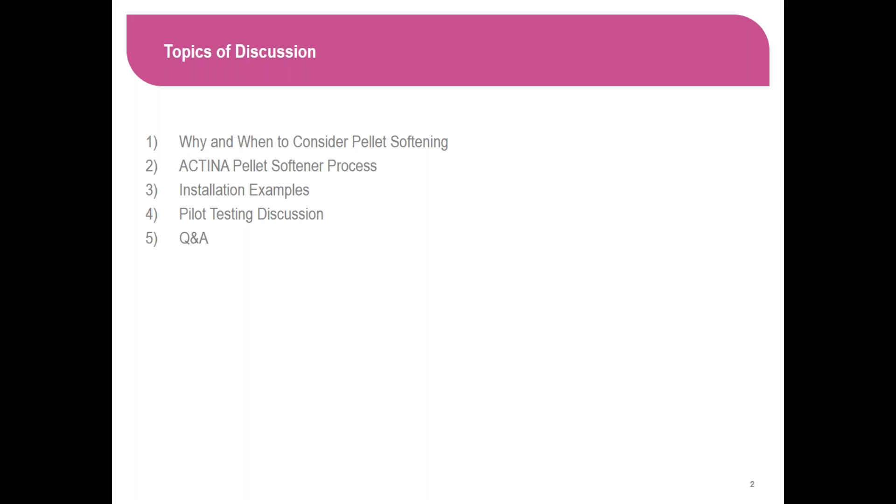So why use pellet softening? It's a very simple treatment process. You can operate it with caustic or lime. There's no moving parts within the process reactor. It is a fluidized bed. So in relationship to conventional lime softening, it does produce more stable operations as far as effluent hardness levels.

Not only do you reduce hardness, but you reduce iron, manganese, fluoride, organics, in addition to the hardness, and that all just kind of happens with no additional effort. You can increase your organics removal, but the iron and manganese just kind of happen at the same time as the hardness reduction.

There's a very small process footprint from a length to width standpoint. It can be tall, but it's a very small length and width footprint. Proven technology around the world. If you're comparing it to some other options like a membrane, you don't have the brine disposal to worry about. And if you're looking at conventional lime softening, obviously you have that lime sludge, that watery lime sludge that you have to dispose of. So the pellets we produce with pellet softening are a good alternative to those two.

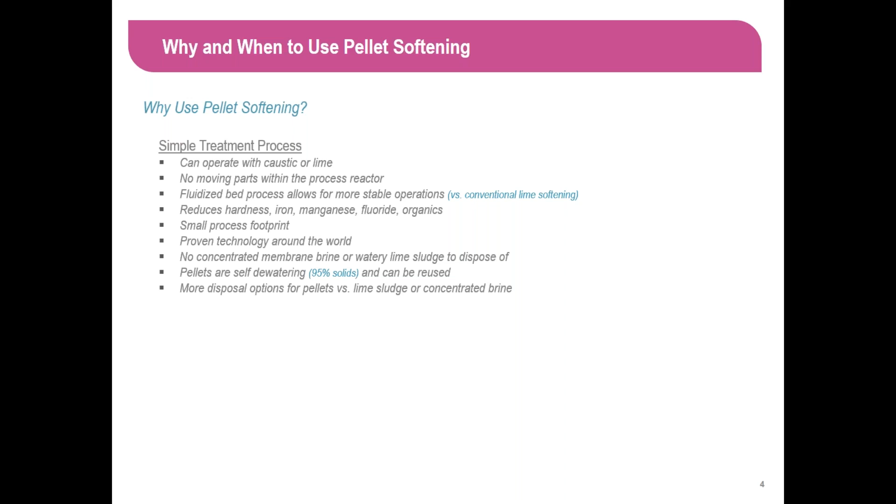So the other part of why you would use it is the operation and maintenance cost savings that are available with it. And we'll get into those a little bit more towards the end, but any equipment or labor associated with mechanical dewatering obviously goes away because our pellets are self-dewatering. And if you have lime sludge and you have a drying bed and some other means of handling your lime sludge, those as well can go away with the pellets, again, because they're easier to handle and are self-dewatering.

If you're just simply going to take your pellets to a landfill versus when you're looking at pellets versus lime sludge, again, we easily get to 95% solids, where if you did some drying and mechanical dewatering of conventional lime sludge, maybe you get to 30 or 40% solids. So just by the simple fact that our pellets can get to 95% solids, there's pretty decent cost savings there just in the number of trips you have to make to the landfill, given the higher solids content.

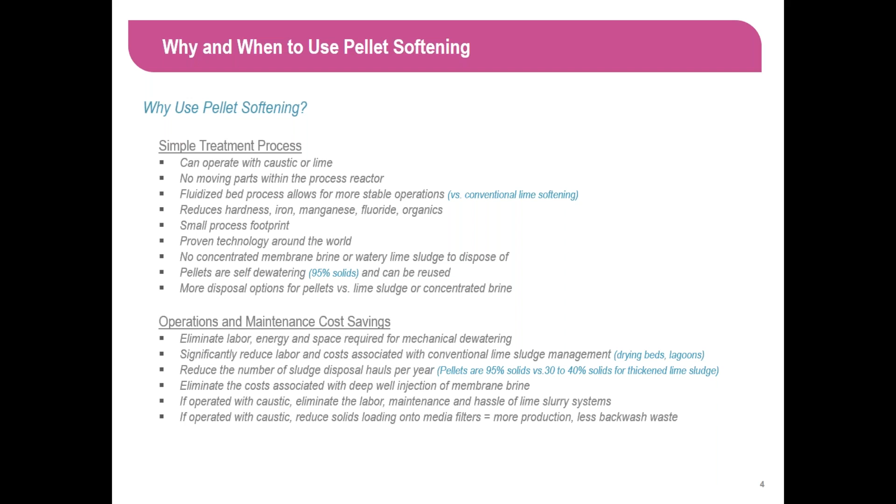Okay, I'll go through these real quick.

So when to use it: if you have current or future disposal limitations on your lime sludge or your brine, that's really been the main driver, either the lime sludge or the disposal of the brine. That's the case in most of the projects we're currently working on in the US with pellet softening. Those two are one of the two main drivers. If you need to expand your capacity but don't have the space to do it with conventional lime softening, you can also use it as pre-treatment to an existing ion exchange system to lighten the load on that ion exchange, reduce your salt consumption, and actually improve your media life and water quality consistency by pre-treating with pellet softening.

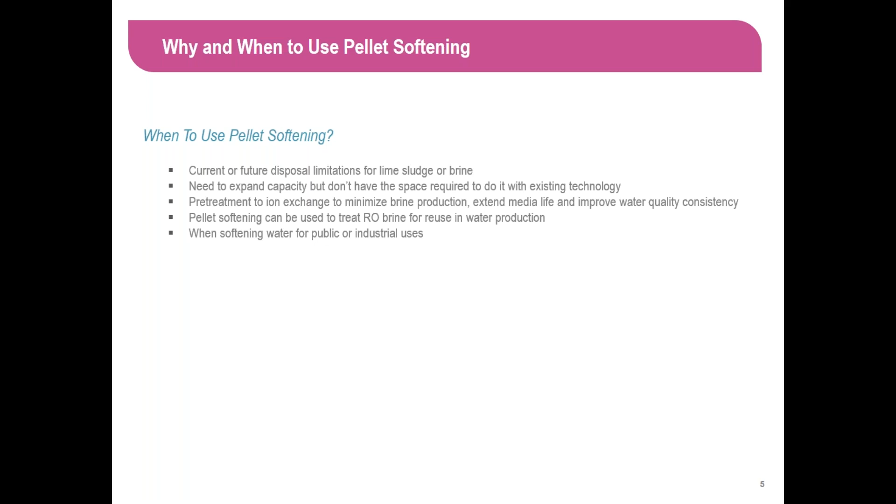You can also use pellet softening to treat reverse osmosis brine - if you're using RO to treat your groundwater and you have a brine, you can actually treat that brine with pellet softening. Really anywhere you're producing water for public or industrial uses, pellet softening is a good option.

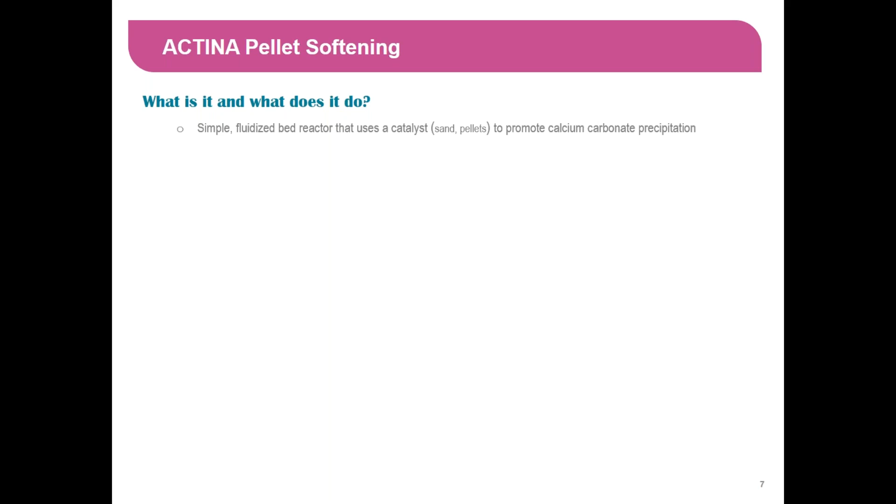So the technology itself is basically a simple fluidized bed reactor that uses a catalyst, whether that's sand or crushed calcium carbonate pellets, and we promote calcium carbonate precipitation on that catalyst. Here's a typical ACTINA reactor where the flow comes in the bottom, goes through some flow strainers, then up through the fluidized bed portion, and into this flared portion where the water slows so the catalyst remains in the fluidized bed portion, and then your effluent comes out the top.

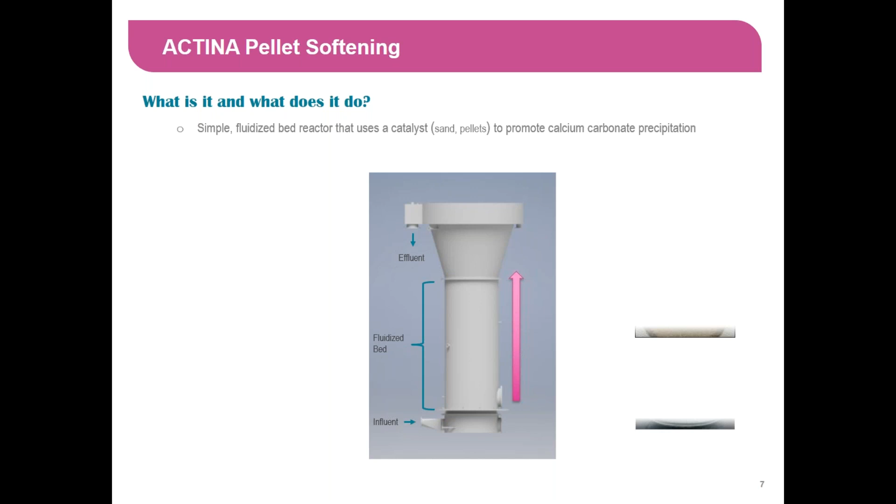This fluidized bed portion of the reactor is full of catalyst, whether sand or calcium carbonate pellets. The size of the pellets or sand will differ over the length of that fluidized bed based on how long it's been running, and so on - which I'll get into in a minute. But that's really where it all takes place.

You'll adjust the pH at the bottom. The change in pH causes the calcium carbonate to precipitate and grow onto the catalyst in that fluidized bed, reducing calcium and some magnesium hardness. Again, we produce easily dewatered, reusable pellets which, depending on your raw water quality, can look something like that.

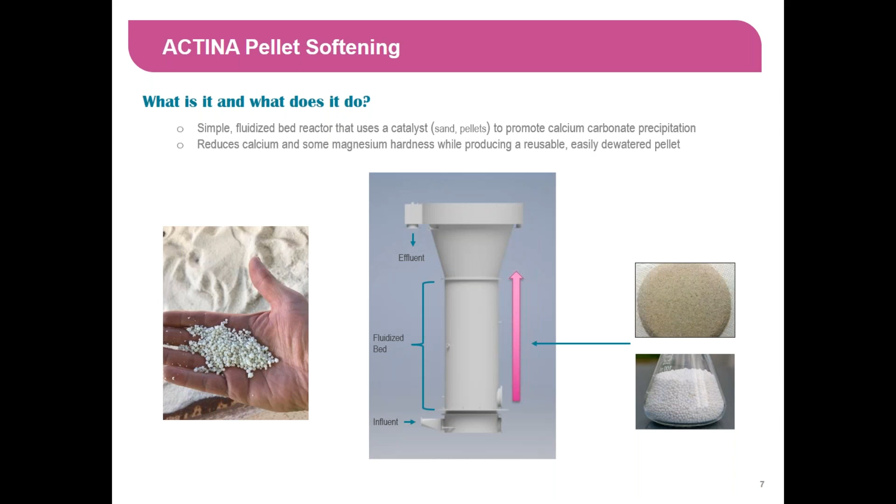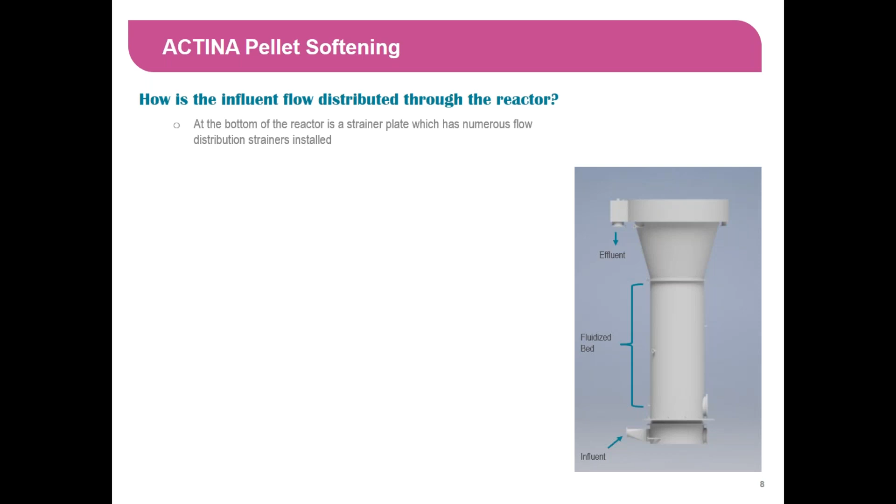So how is the influent flow distributed through the reactors? At the bottom of the reactor is a strainer plate with numerous flow distribution strainers installed. If you take this bottom portion of the reactor and pull it off to the side, the strainer plate is what you see on top, and the nozzles are the individual components attached to the strainer plate. So that strainer plate - say there are 200 strainers - is a metal plate with holes in it, and each individual strainer goes into one of those 200 holes.

This is what one of our flow strainers looks like. We use a strainer that's been specifically designed over the years for pellet softening, with a lot of advantages. It does a really good job of equally distributing the flow, but it also allows material to pass through the strainer, which I'll show you in more detail in a second. Pellet softening is pretty straightforward, but that even distribution of flow coming up through the reactor is really critical.

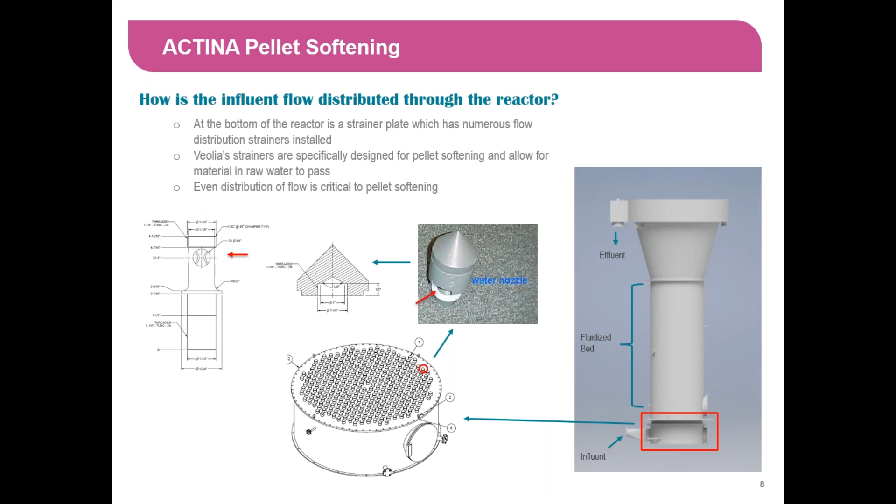This strainer is in two pieces: a cap, and this other portion. There's a lip right here that sits on the strainer plate - this part goes through the hole, this side is threaded, and the lip sits on top of the strainer plate. We just use a nut to attach each individual strainer to the plate. The flow comes up through the middle and comes out through these three holes, and the cap sits on top with slits as well. Again, the purpose is to equally distribute the flow while allowing any material that may come in with the raw water - say small particulate - to pass through without creating a clogging problem at the base.

This is a picture of multiple flow strainers installed in the strainer plate at the bottom of one of our reactors.

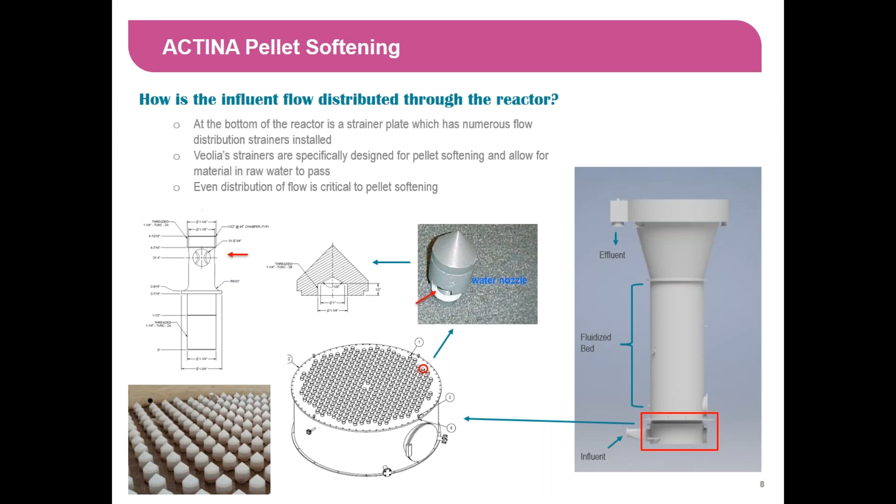So for chemicals, we will increase the raw water pH, as I mentioned before, with either caustic or lime. We have the fluidized bed catalyst, which is either sand or calcium carbonate pellets. On the effluent side of the reactor, we reduce the pH back down to something towards neutral, 7 or 8, to stop that precipitation reaction before the water goes downstream, whether to filters, a membrane, or whatever. So you simply adjust the pH back down.

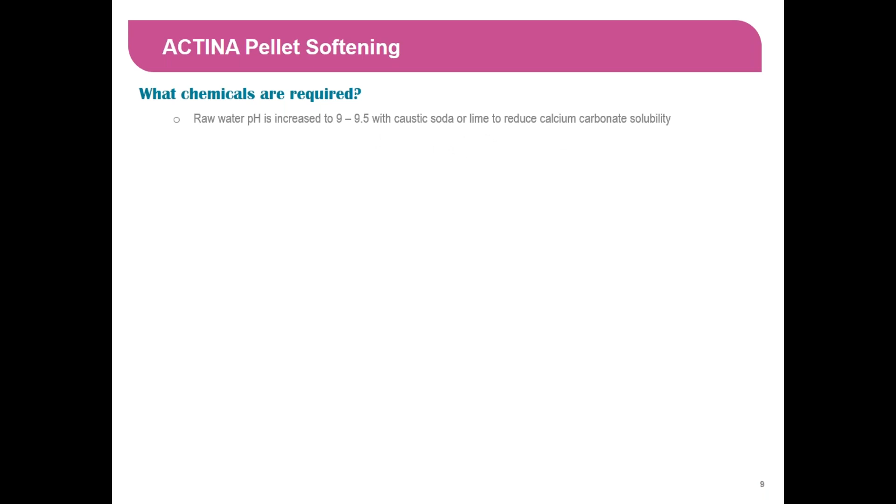So let me focus on increasing the pH real quick. You get the same reactor diagram. At the bottom is where we have this removable spider, and what we do is inject, whether it's caustic or lime, using softened carrier water to deliver that pH adjustment chemical to this spider, which sits at the bottom of the reactor just above that strainer plate I showed you in the previous slide.

If you take that section away, the blue plate is the strainer plate, and then you see the gold colored flow strainers. Right above that is that circular support structure, which we call a spider or chandelier. On that, you'll see there are 3 nozzles. Each nozzle has a pH adjustment line going to it and a softened carrier water line going to it. The purpose is to bring those in individually and then combine them together under pressure in the nozzles so they disperse out through each of the nozzles.

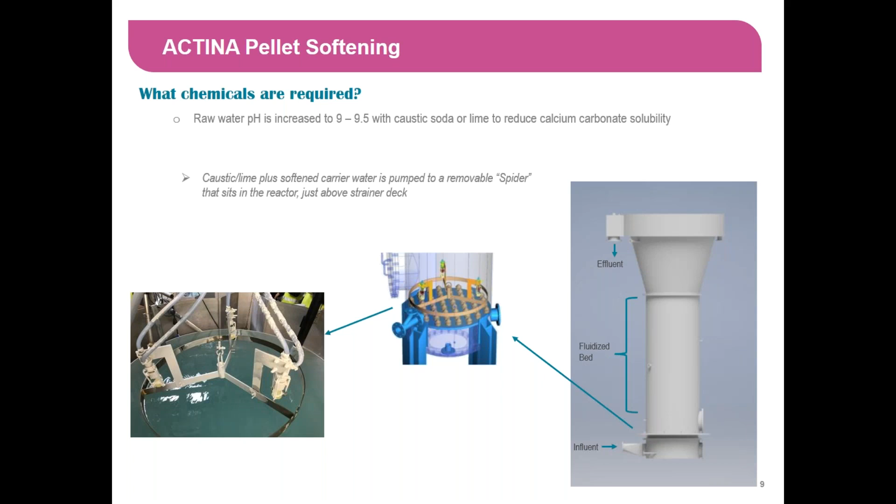The number of nozzles in any given spider is driven by the diameter of the reactor. The bigger the reactor diameter, the more of these nozzles you will have. In this particular example, you have 3 separate nozzles on this spider. This thing is suspended from the top. In the picture to the left, you can see there's a cable attached to it. It goes all the way to the bottom of the reactor and sits there, connected at the top, so if you need to remove it, it can easily be removed without having to drain the reactor itself.

At the top of the reactor, in a separate panel, we'll have a rotameter and pressure gauge on each one of these lines going to the nozzle. So while this thing is sitting at the bottom of the reactor, you can have a good idea by looking at these rotameters and pressure gauges if there's some type of issue going on, whether your flow isn't the same between the three nozzles, or you see elevated pressure in one of them. The intent of having this thing suspended from the top is if you do see some type of issue, you can pull it up, pull it out of the reactor, inspect it, do what you need to do to it, and then put it back in pretty easily.

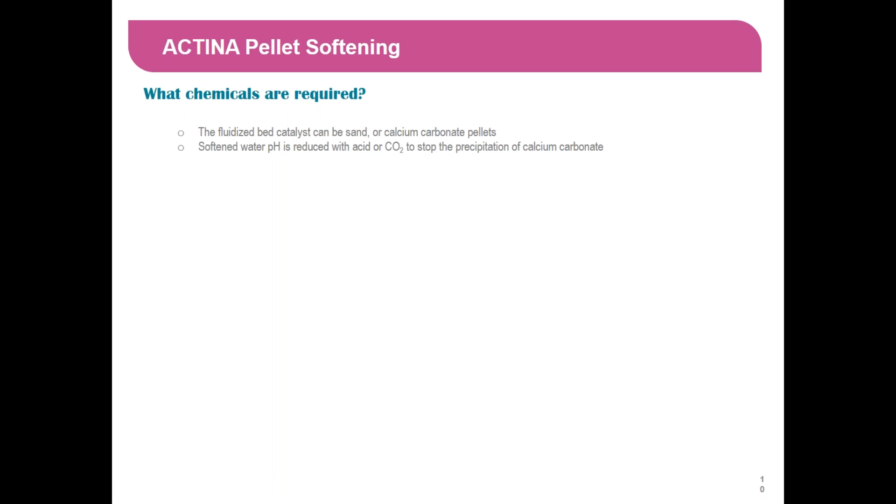Continuing, so the fluidized bed with the catalyst is added either by a pump or an eductor into the side of the reactor or to the top of the reactor, and there are a couple of different ways you can do that. Depending on the size of the reactor, I would say the most common way is with some type of bulk storage, whether it's a bulk bag system, which holds like a 2,000-pound super sack, or a small or large size silo that holds the catalyst.

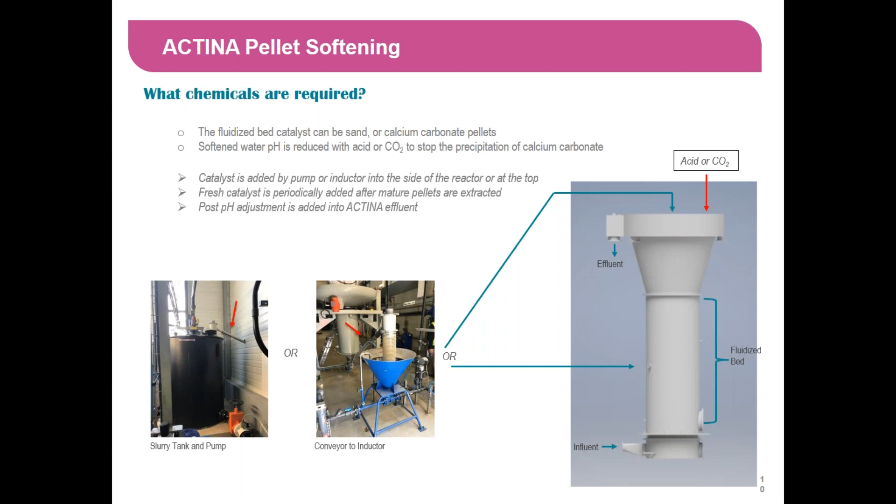So when and how are the pellets extracted?

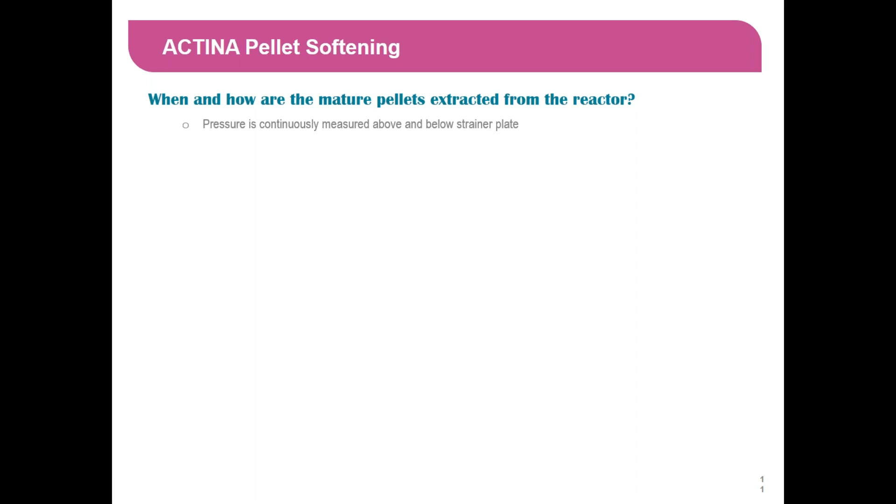We continually monitor the pressure inside the reactor. The strainer plate I mentioned earlier, which has our flow strainers, is here—you can see the weld marks, and the plate is obviously inside the vessel. We monitor the pressure below and above, and the difference between those two we correlate to a pellet size in the reactor itself. This is a relationship we set up during commissioning.

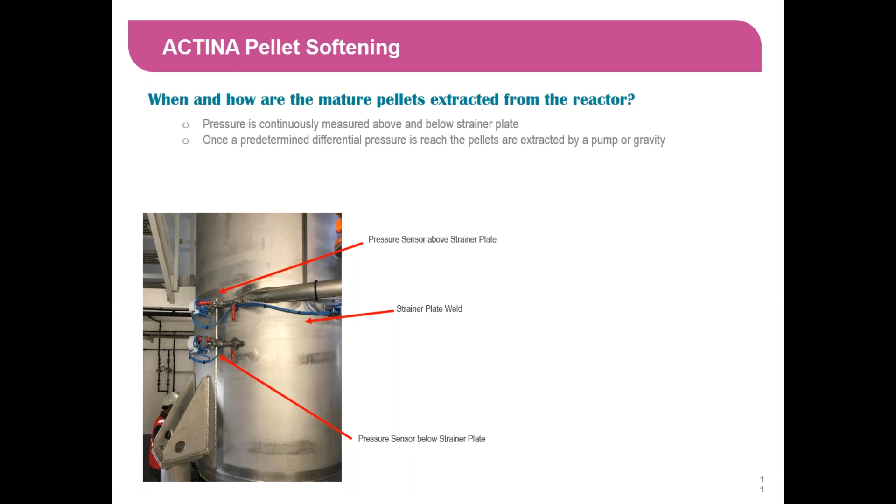So there are two ways you can do it. You can use these pressure indicators, or you can just go by time—like it's run for 9 hours, so it's probably time to do an extraction. But either way you trigger the extraction, the pellets are extracted either by a pump or by gravity.

When the extraction actually happens, there's a separate pipe off to the side of the vessel with a valve. Once you open that valve, the head pressure from the reactor pushes out the pellets through that piping. It stays open for a certain amount of time, then closes and flushes the line—that's pretty much an extraction. You don't stop flow during the extraction.

What's going on inside that reactor is you have different size pellets inside that fluidized bed portion. The larger pellets will be towards the bottom because they're larger and heavier, so we want to extract towards the bottom. If you look at that picture to the right, just below the pellet extraction pipe you can see the weld marks for the strainer plate—so we're drawing off the pellets right at the bottom of the reactor. The purpose is to get the larger ones out and keep the smaller ones inside, because it's a fluidized bed, so if the pellets get too big it's harder to fluidize them. You manage pellet size either based on this differential pressure or by time.

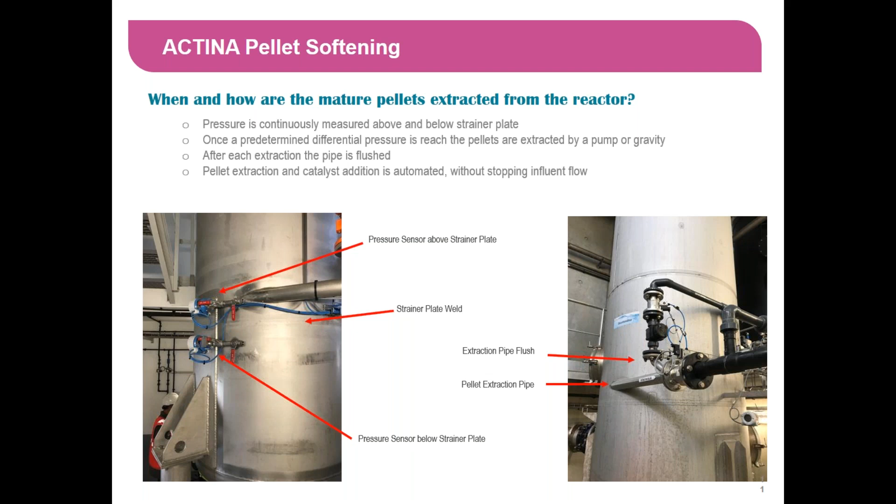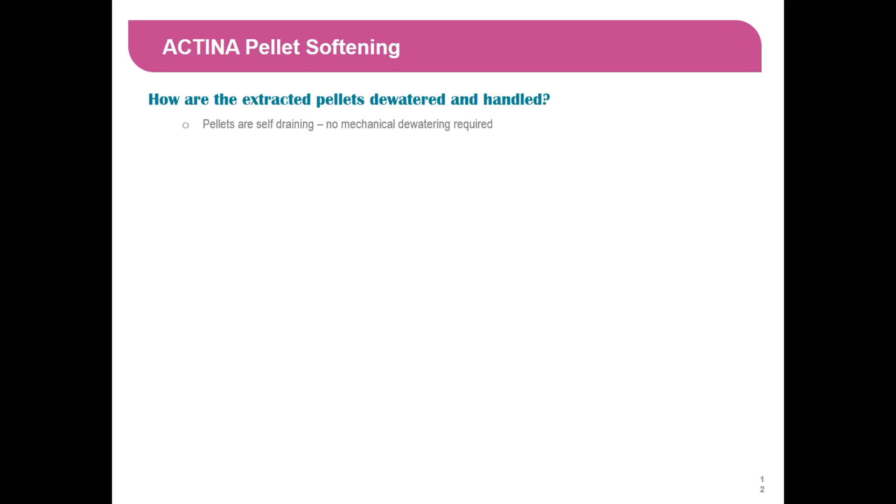So how are the pellets dewatered and handled? As I'd mentioned before, they're self-draining—we don't need any mechanical dewatering. A lot of times it's just these simple bins; I've seen Baker Tank has these. It basically has a screen at the bottom of the bin, with probably 6 or 8 inches of headspace underneath the screen.

The pellets get extracted into this bin, and the screen maintains the pellets in there while also allowing the water to drain out away from the pellets. It's hard to see in this picture, but in the front of the bins there are these drainage ports. This one is a single bin, and you can see the pipe here coming out from the plant.

Depending how close this bin is to the actual reactor, you could just do it by gravity, where you open that valve and the pellets make their way into this bin. This one obviously is outside, so it just has a simple tarp that you can pull over it to keep the rainwater off.

The one down here is kind of a duty standby scenario, where this one is covered to keep the rain out, but you can see there's a PVC pipe that comes out here. It basically has a piece of rope on it, so you can change which bin you're discharging to, just by swinging it over. Or you can move within a bin to which part the pellets are actually discharging into, which I'll show you here in a second to better explain that.

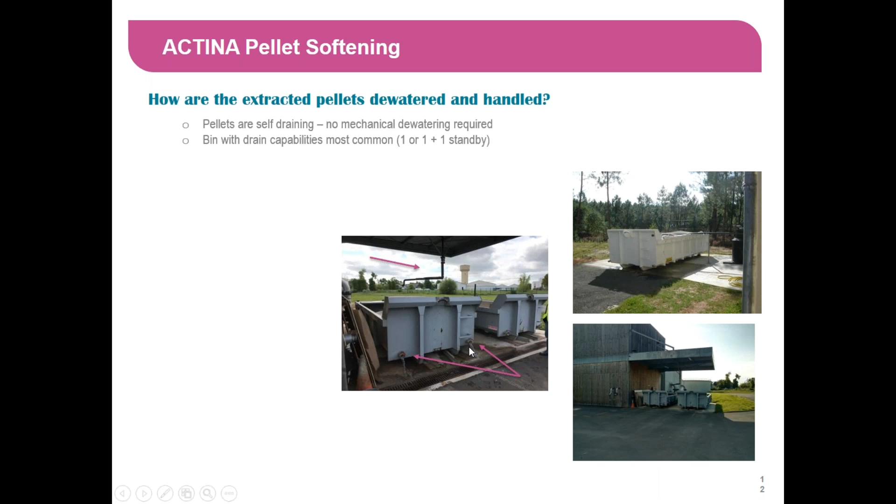Here you can see the water that's running off the pellets. Again, there's a screen maybe 6 or 8 inches above the bottom that retains the pellets but allows the water to drain off.

For larger installations with higher hardness, it really comes down to your pellet production rate, but you may need something more substantial for the pellets. I'd say all the projects we've done and worked on so far haven't required this large pellet storage, but there are a few different versions we've designed. It really just comes down to how much flow you're treating and how much hardness you're removing.

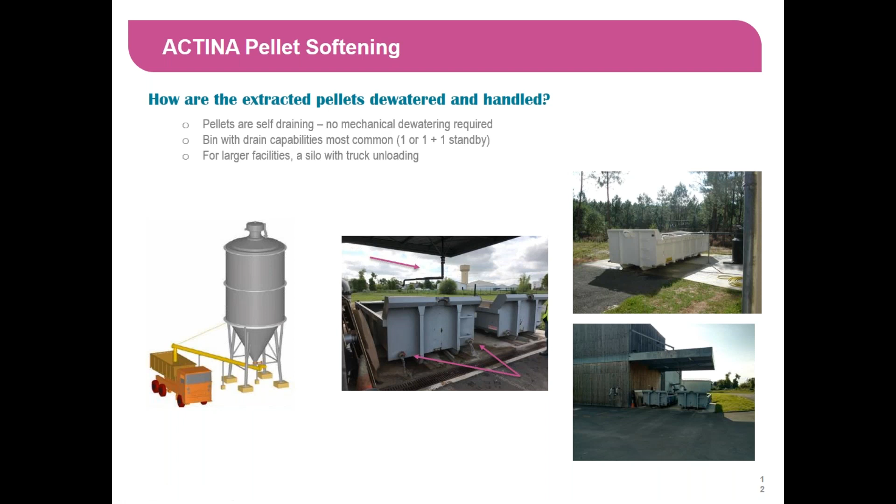In this particular installation, they're surrounded by farmland, and the farmers come, I think, once a month and actually take the pellets and use them mostly for fill. This installation doesn't have any pellet disposal at all, the farmers come and take it for free. The runoff or drainage you see here can be recovered and sent back to the head of the plant, it doesn't have to go to waste. So there's a lot of different options you can do with that.

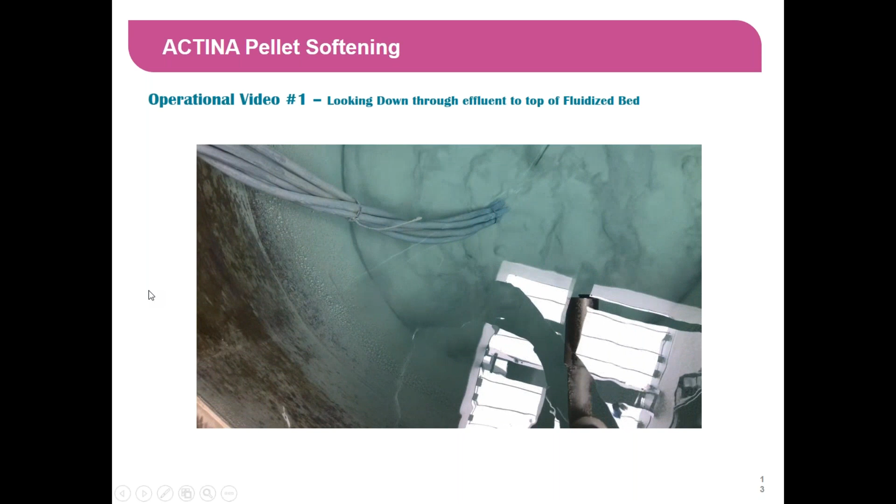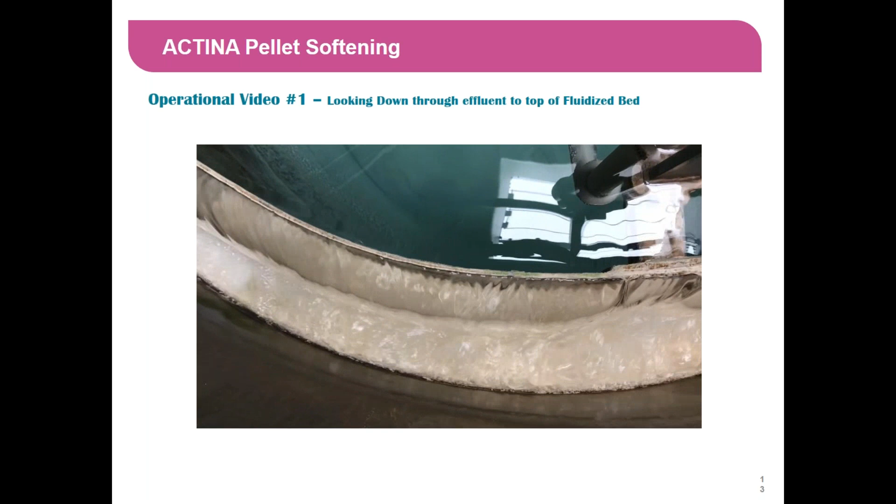Here you look down on top of the fluidized bed, so you can see it's really nicely, evenly distributed throughout the cross section of the reactor. You can see the tubing that's going down to the spider to each of the nozzles. This is the overflow weir, just a straight edge weir that goes all the way around the top, so the softened water comes out.

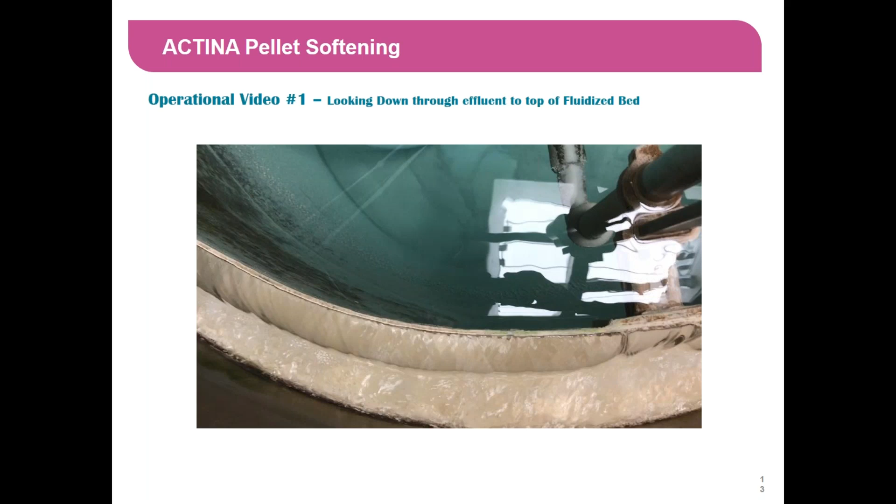If you were to adjust the pH, you could easily drop it into this outer rim. There'll be a common discharge point on one side of the top of the reactor, so you could add the acid towards that side, and it doesn't really take a whole lot of mixing. You can achieve that decrease in pH pretty easily before it goes downstream.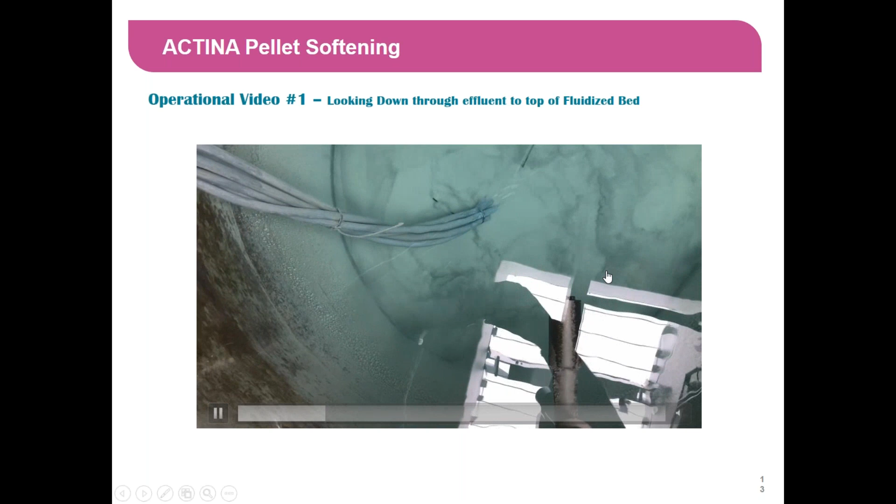Let me show you just one more time. So again, what you're looking down on is the fluidized bed. This cable attaches to the spider, and these hoses go down to the nozzles on each spider.

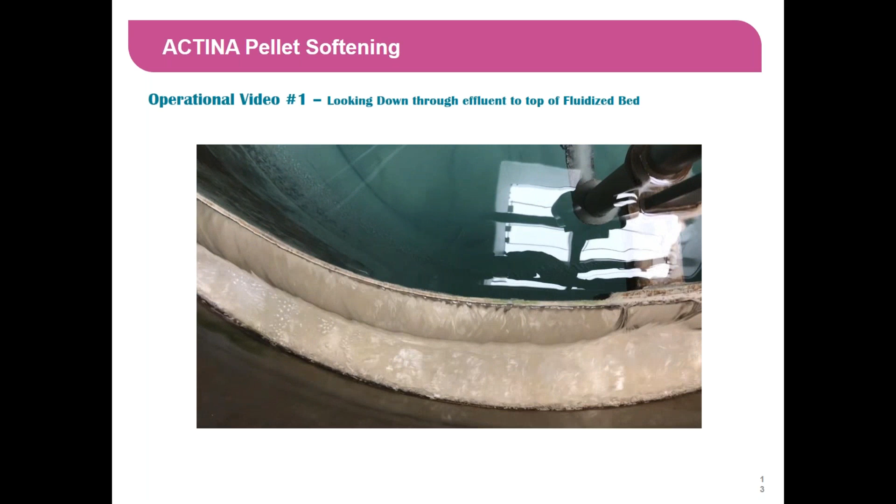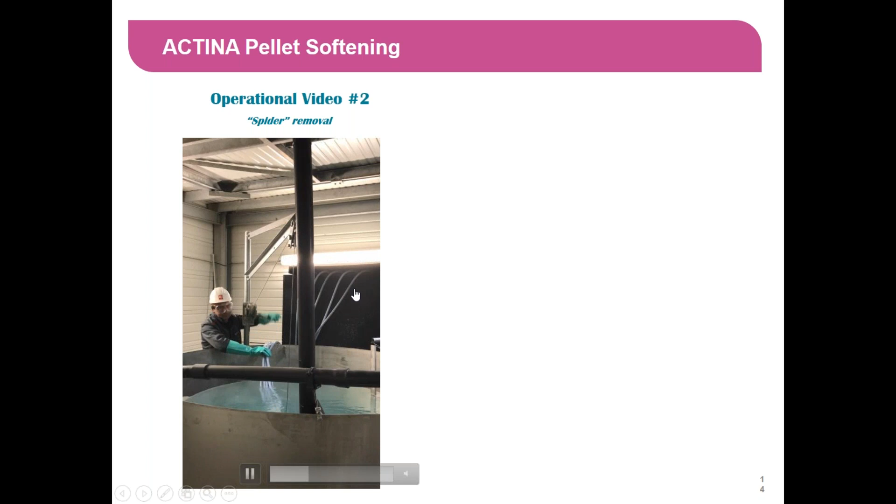Okay, the next one I want to show you is the actual removal of the spider itself. This whole process took about 5 minutes, but this is the tail end of the removal. This panel behind here is what I had mentioned before, which houses the rotameters and pressure gauges for each of the lines going to each nozzle, so you can monitor what's going on at the bottom of the reactor in that spider.

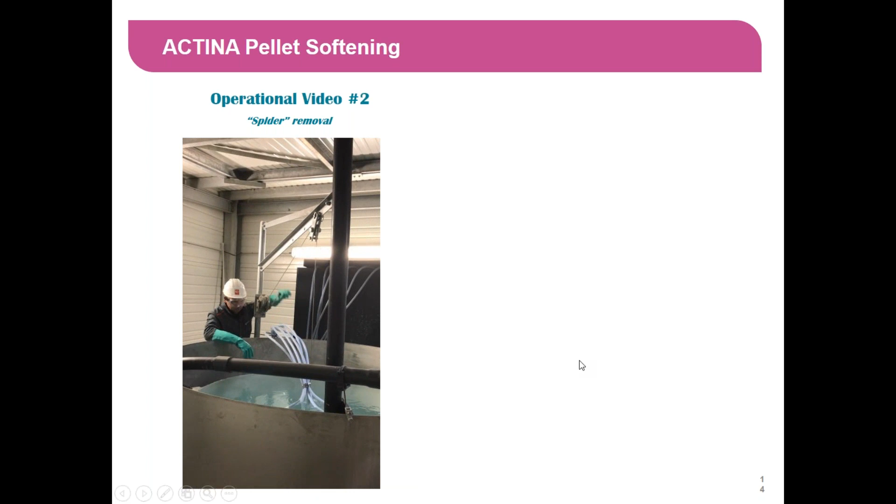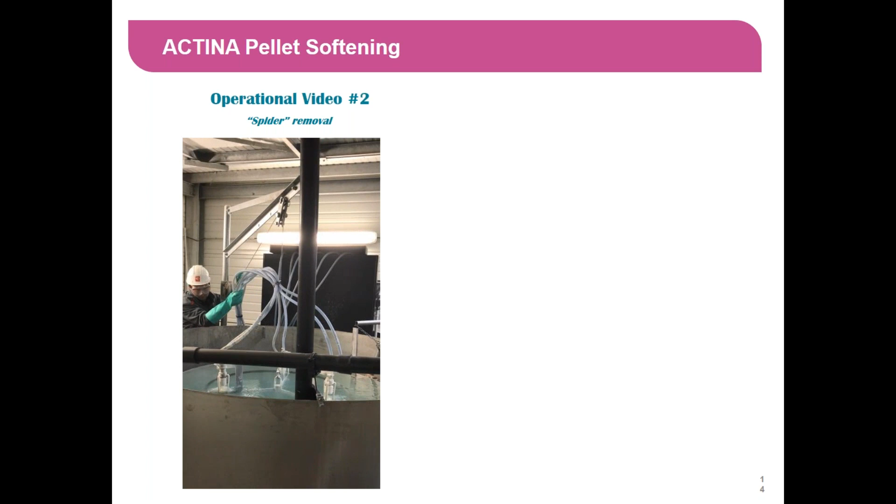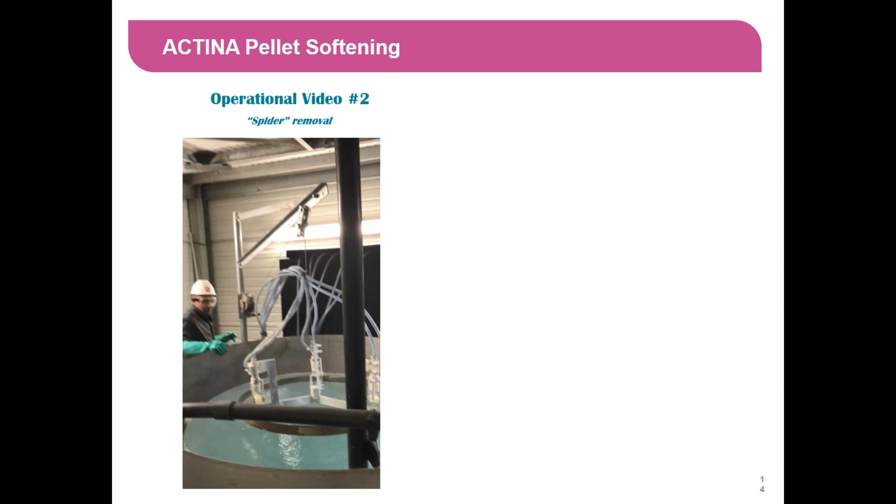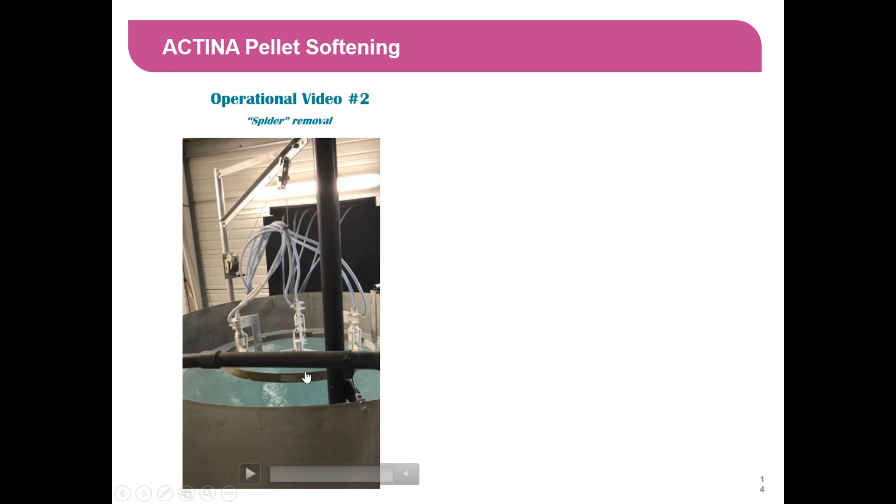So here you don't have to have flow going through the reactor, but when you lower the spider back down into the reactor, you do have to have the media expanded. But if there was something you wanted to look at, or you thought maybe there was a problem, you could easily pull this up, do what you needed to do, and then drop it back down. Ideally, you want to have the ability to raise this above the upper level of the reactor and be able to swing it over, and have grating or checker plate over here where you could lower this spider back down and do what you need to do, then pick it back up, swing it over, and drop it into the reactor again.

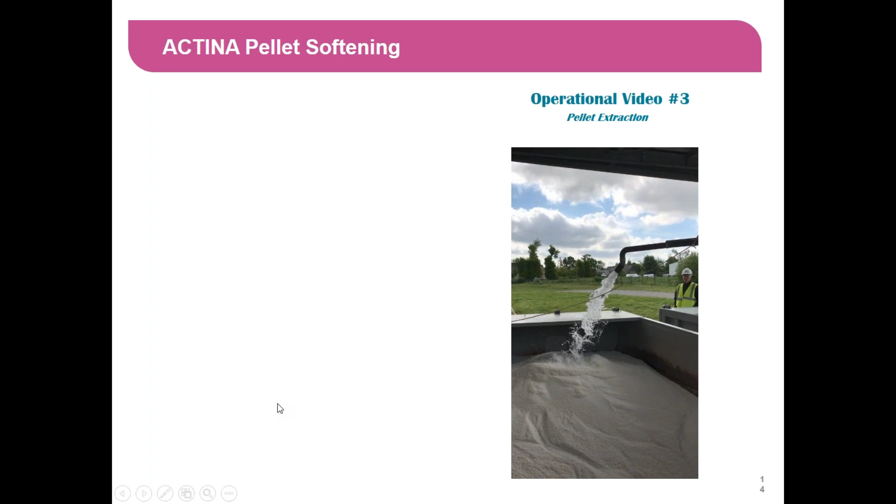So this is the pellet extraction. This was that 2-bin example that I was showing you, and you can see the discharge pipe there, and then just the rope that's attached to it where they can move it to where it's discharging in different spots within a bin or swing it between the 2 bins.

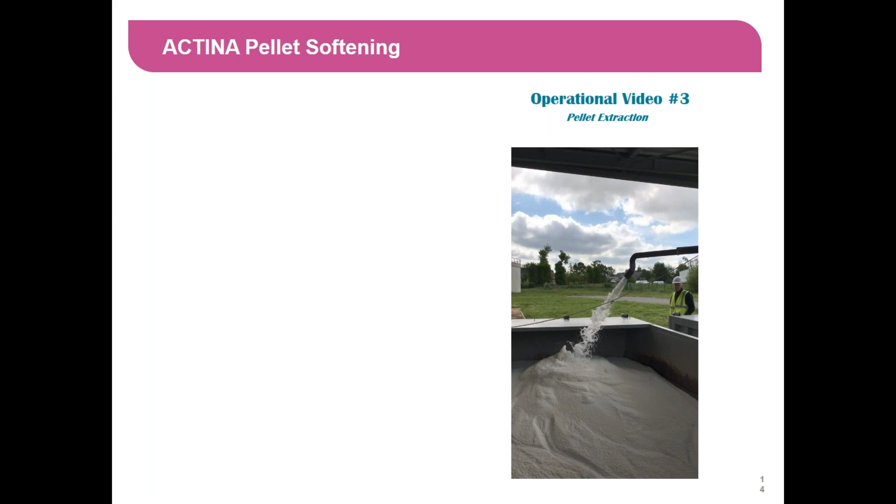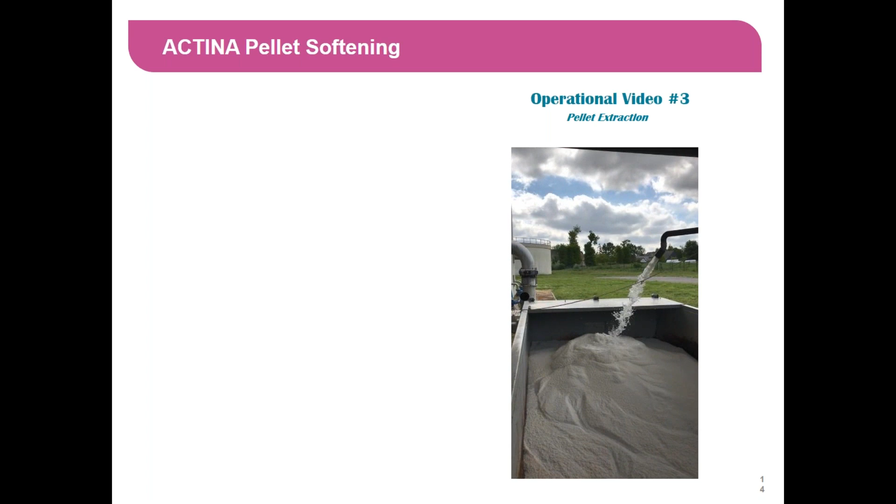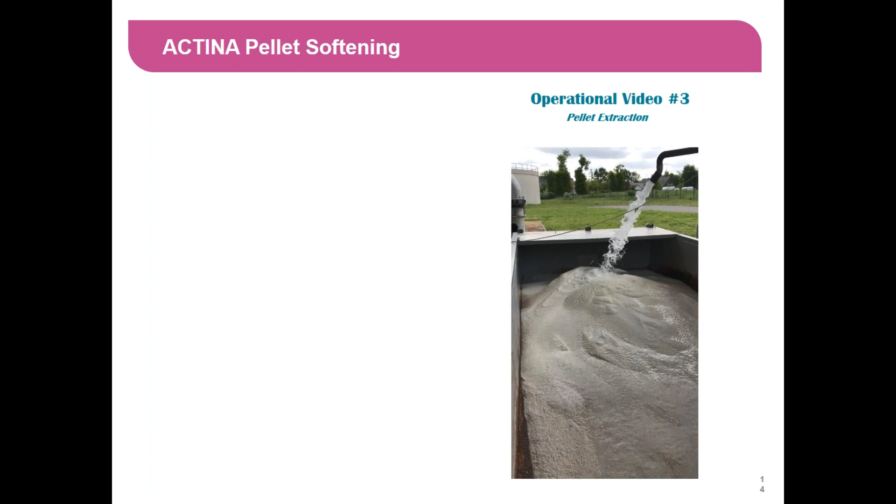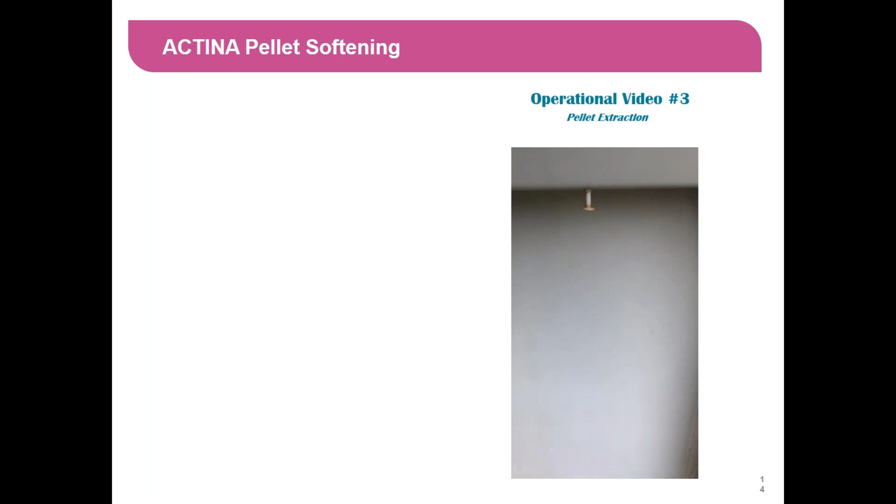But what you'll see off to the left is how quickly the water runs off these pellets. These pellets are coming straight out of the reactor. This has a pump, so it's being pumped from the pellet discharge point in the reactor into these bins. You can start to see on the left a little bit of water running off, and the longer the extraction interval goes, the more water starts to run off these pellets. So not only are you getting direct runoff just from the top, but the water is also seeping down through the pellets and going from top to bottom as well. And these bins slope from back to the front, so the water simply runs off.

And again, you can capture this water and send it back to the head of the plant, or you can send it to a drain, whatever is best.

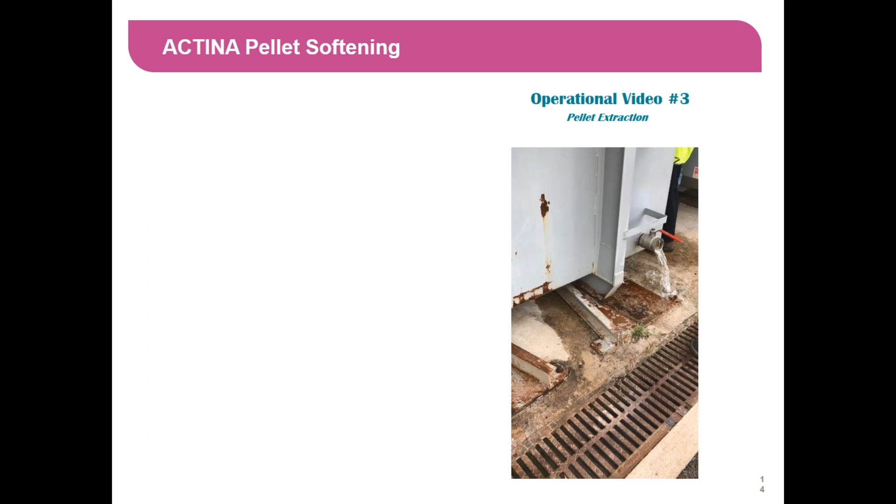Okay, examples. So we have 50 plus installations worldwide. Veolia as a company has been doing pellet softening for over 25 years. We have some large installations, some small ones, and a lot in between. I think we have a really good mixture of these different sizes. I would say most of what we've been working on in the US has been in that 2 to 10 MGD range, so we have a good amount of installations in those flow ranges.

A lot of the installations in Europe, especially France, Veolia also operates some of these installations. So not only do we have a lot of good design and commissioning experience, but we also can get return on experience from the Veolia operators that operate these different ACTINA facilities around the world to figure out what makes sense, what should we change, what should we improve.

Just to give you a couple examples: in Copenhagen, Denmark, there's a water provider that has multiple groundwater treatment plants, and they are in the process of installing pellet softening in all 7 of these plants. It's kind of a neat circumstance currently, because some have already been commissioned, some are under construction, some are in early construction, and some are still in the design phase. So it's a neat place to get a real in-depth understanding of the different phases of what these projects will look like.

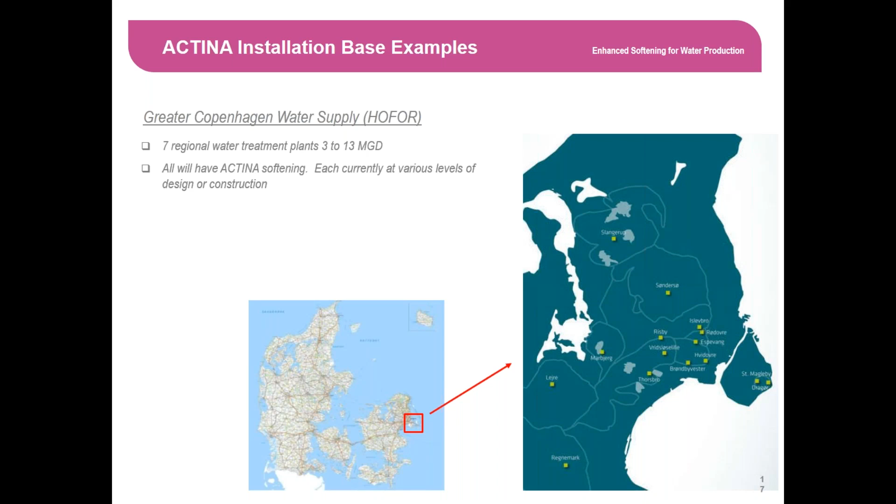In Denmark, the Veolia office also can access the consulting, so they'll do controls, full scale, the whole plant layout and things like that. So again, if there was a place to visit outside of the U.S., this is a good place to be, to get a lot of different aspects of construction, design, and operation all in one trip.

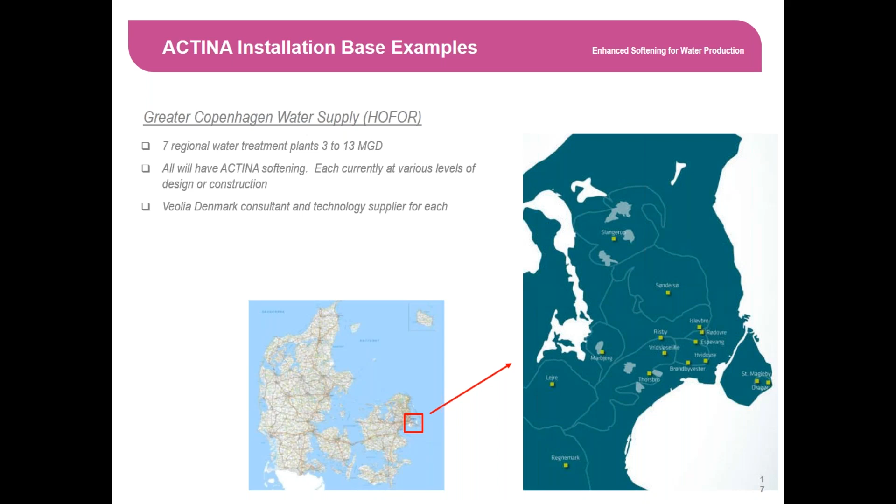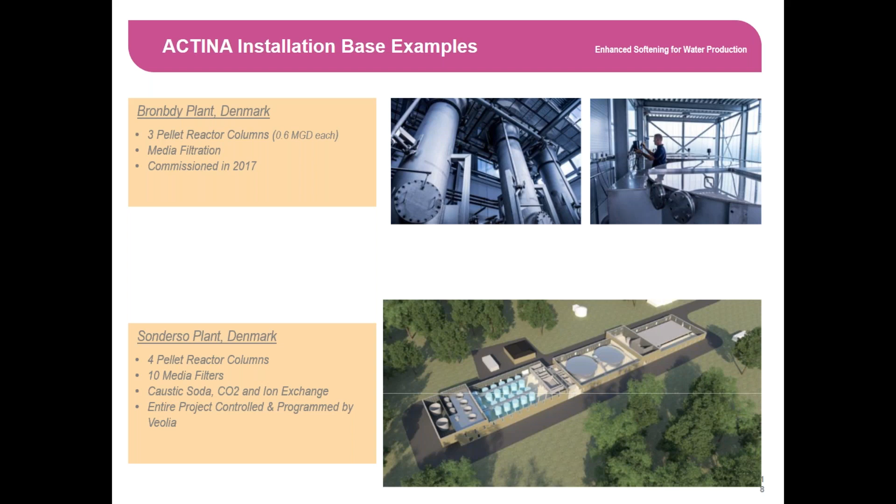Most of these plants for this municipality just had a pretty basic groundwater treatment plant, and adding pellet softening to each one is a fairly major upgrade for all of them compared to what they currently do. So it's also a good place if you had operators that are maybe just operating a very simple groundwater plant now, where they just pull it out of the ground, disinfect it, and send it to distribution. These operators have gone through that progression from a relatively simple plant to now having pellet softening, filters, chem feed, and all these different things. So again, it's kind of a neat place to go and get the full advantage of these experiences from both Veolia and the people operating these plants.

There's one in France. I bring this one up because they actually have a CO2 stripper upstream of ACTINA, which is kind of what we currently have at the New Smyrna Beach project that some of you may have visited, our pilot.

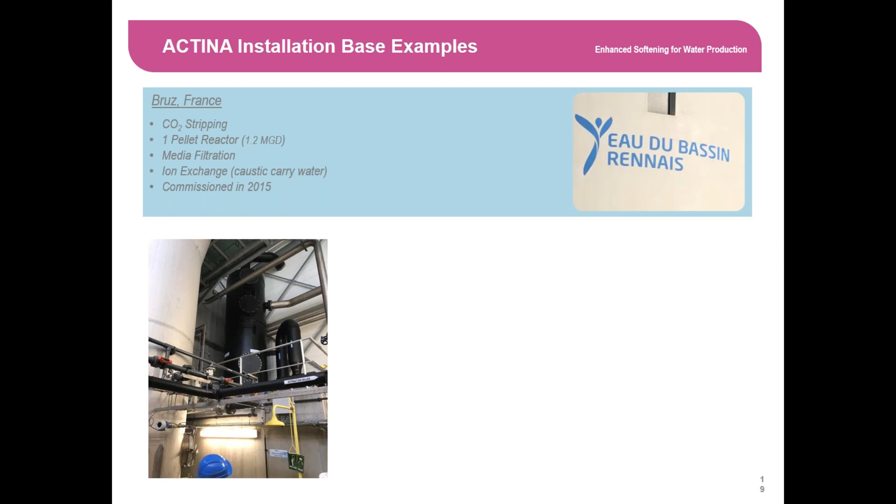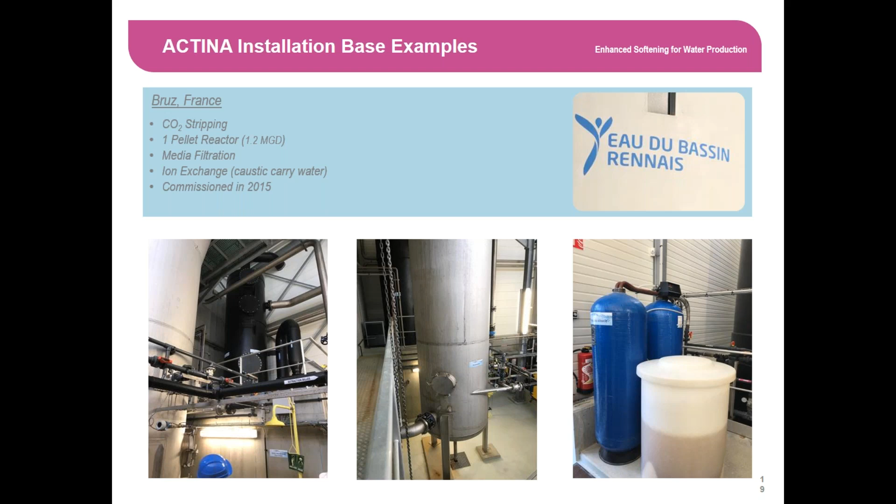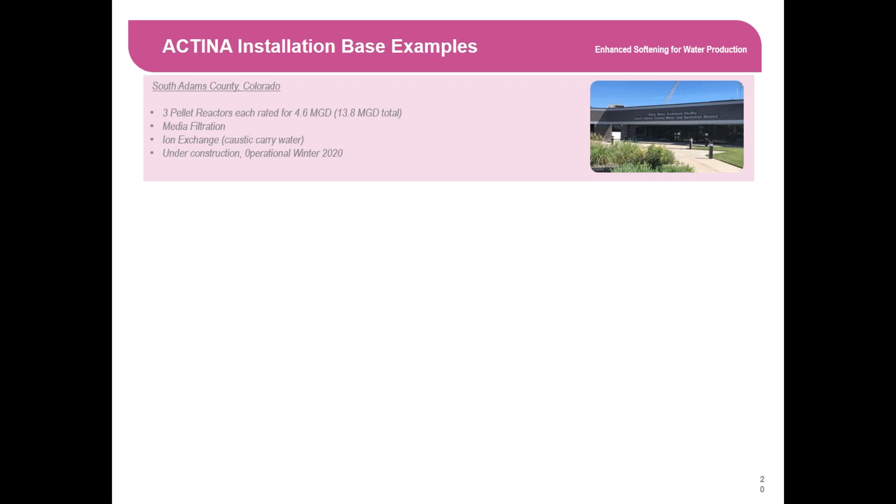A little closer to home, South Adams County, Colorado. This one will have 3 reactors, 4.6 MGD each. They have a spot for a 4th reactor for future expansion. It's currently under construction. Hope to have it online sometime this winter, either winter of 2020 or 2021.

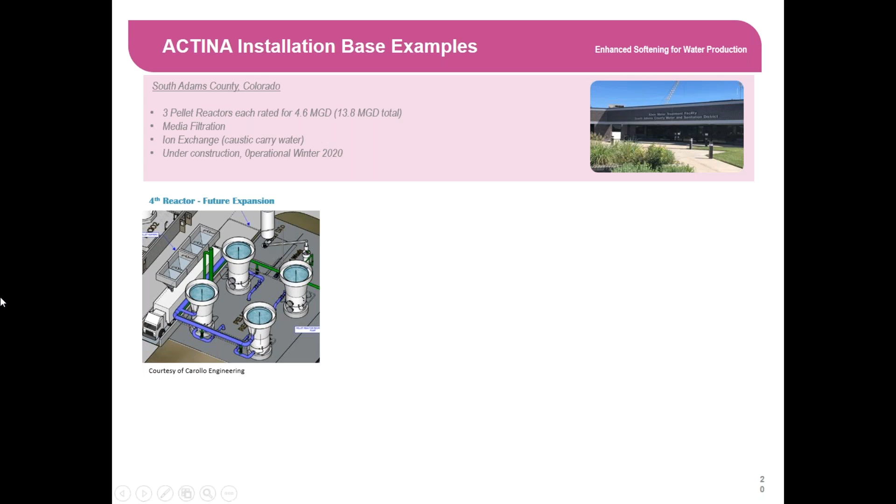Our reactors are approximately 25 feet tall, and the upper portion is about 17 feet in diameter. Here you can see the actual assembly of those reactors on site. This was this summer. They came in 2 pieces, so they're pretty substantial in size, pieces of steel.

Here's what they look like, all 3 installed. Again, they have a spot for that 4th reactor that's sometime in the future. From a timing standpoint for construction, obviously they had to get these installed before they could button up the building.

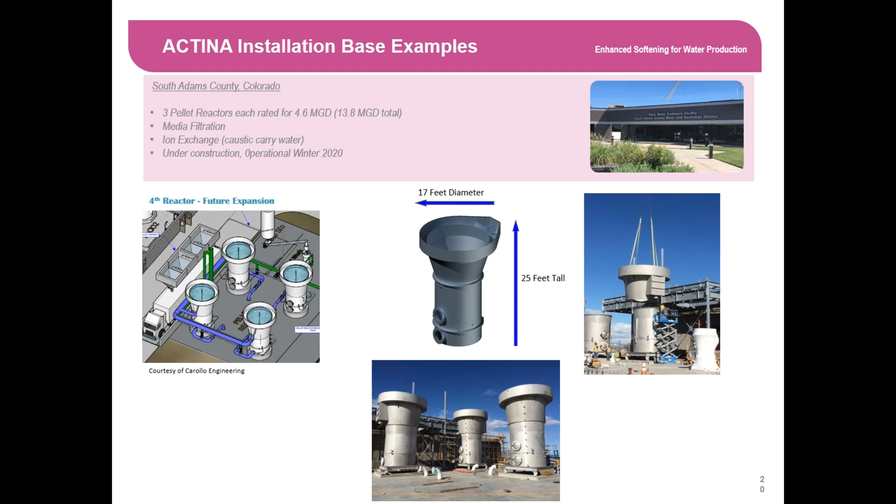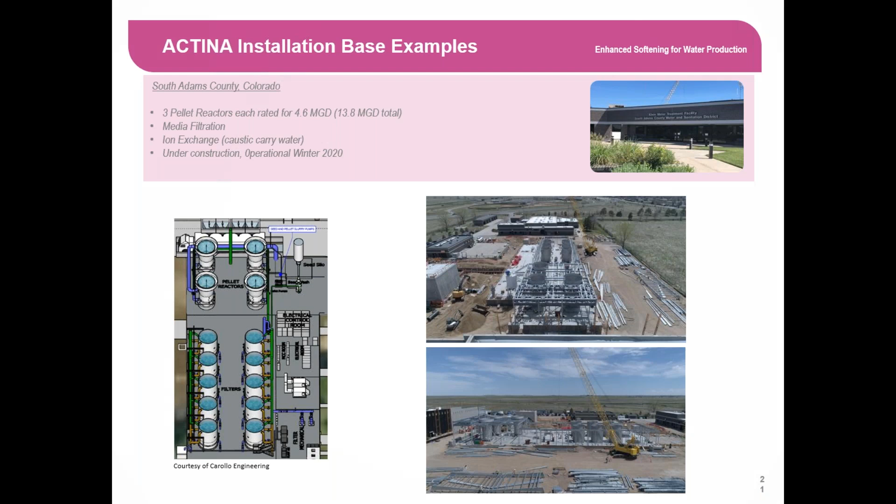Okay, going into some pilot testing discussion.

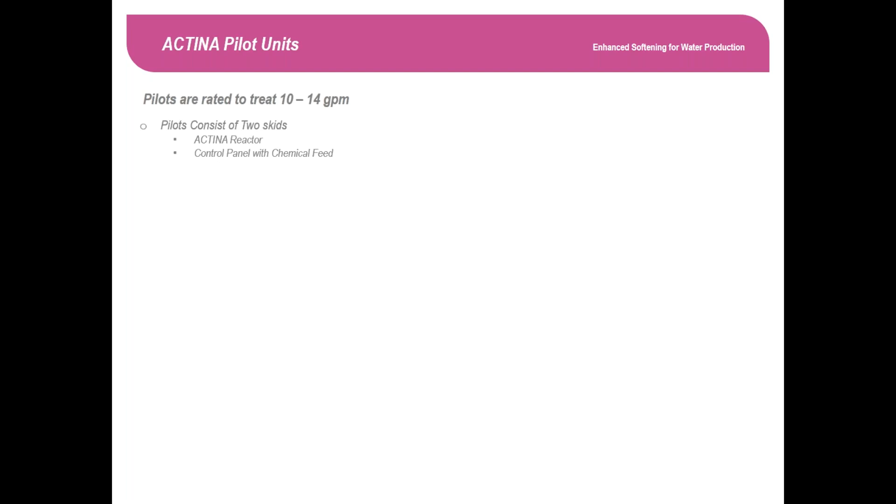Our pilots are rated from 10 to 14 gallons a minute. They basically have two skids: the ACTINA pellet softener skid, and then a control panel and chem feed skid. With the pilot, we can use either caustic or lime. We do have automatic control of the pellet extraction, just like you would see in a full scale, where we just have a pinch valve that would open based on differential pressure or time, and we would collect those pellets.

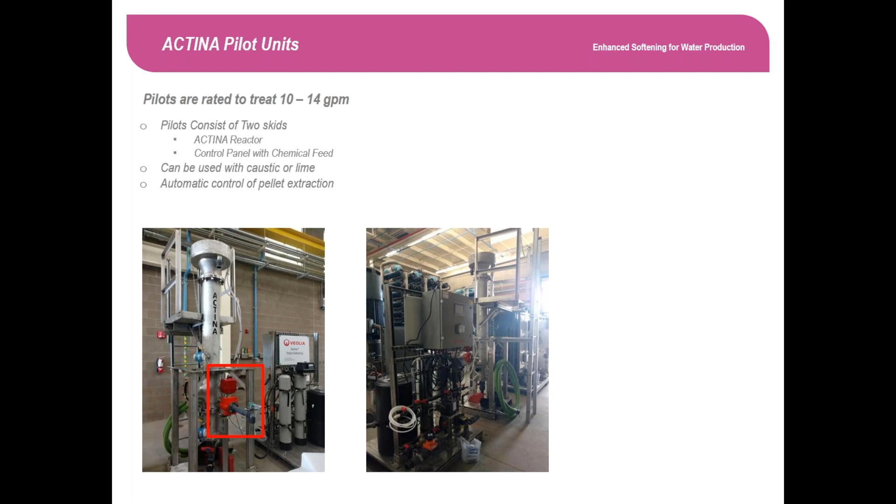One thing that we can do, and we've done this a lot in the pilots to date, is we have multiple sections of different heights that we can incorporate into the pilot. If you look at the one on the left, that's the base setup, and then we can add 2 foot, 4 foot, 6 foot, multiple 4 foot, so whatever sections in between to get different bed heights or reactor heights.

That allows us to really optimize that bed height based on the influent water quality and the desired effluent water quality. So height is a cost, especially if you're putting this in a building. Our pilot allows us to do variations in heights to optimize where we need to be to achieve the effluent quality we're trying to achieve for the testing.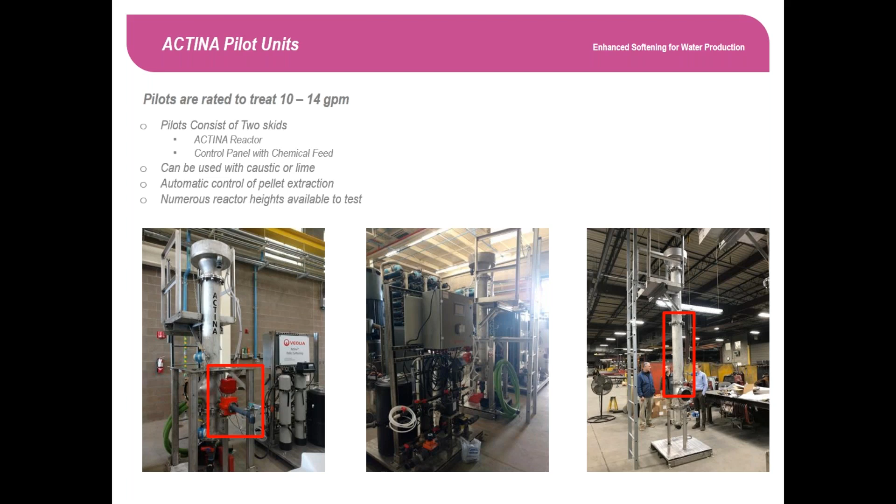That can come into play, it can help us avoid adding a pump station, or if there's existing buildings or something like that, we can really do different heights during the pilot to come out with the data that we need to provide the best fit for the project.

Boynton Beach, Florida, just a quick summary. We did that earlier this year. Again, you got the two setups: the control panel skid, and then you have our actual pellet softening skid.

So again, when we do pellet extraction in the pilot, we have basically a 55-gallon drum with a hole in the top, and then a 5-gallon bucket with holes in the bottom covered with window screen. This valve opens in the pilot, pellets come out into this bucket, and there's a screen and holes in the bottom of the bucket so the water drains off into the 55-gallon drum, while we retain the pellets in the 5-gallon bucket.

In Boynton Beach, they had decent levels of iron in the raw water, so the pellets removed the iron as well as the hardness, so the pellets were more of a wet sand color versus the white pellets I showed you earlier. It doesn't really change the makeup of them, it's just the color is a little different depending on what might be in the raw water.

That stencil you see is actually in millimeters, so these pellets we extracted were about 1 to 1.5 millimeters in diameter.

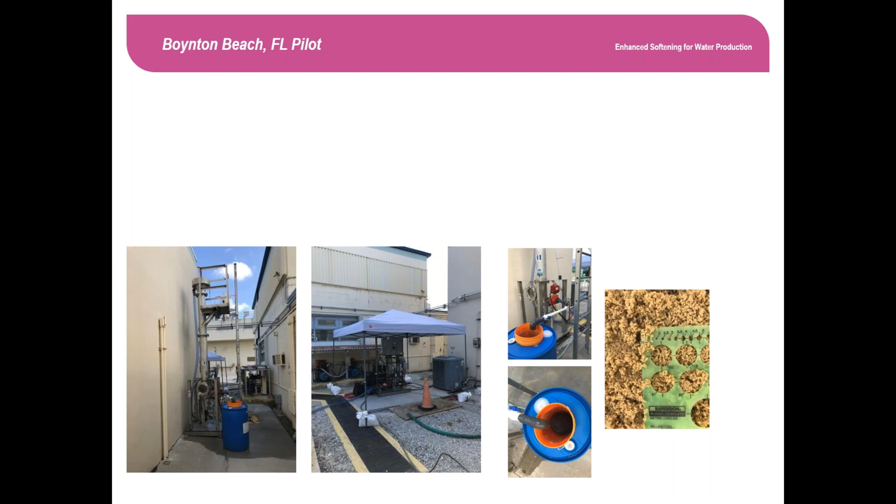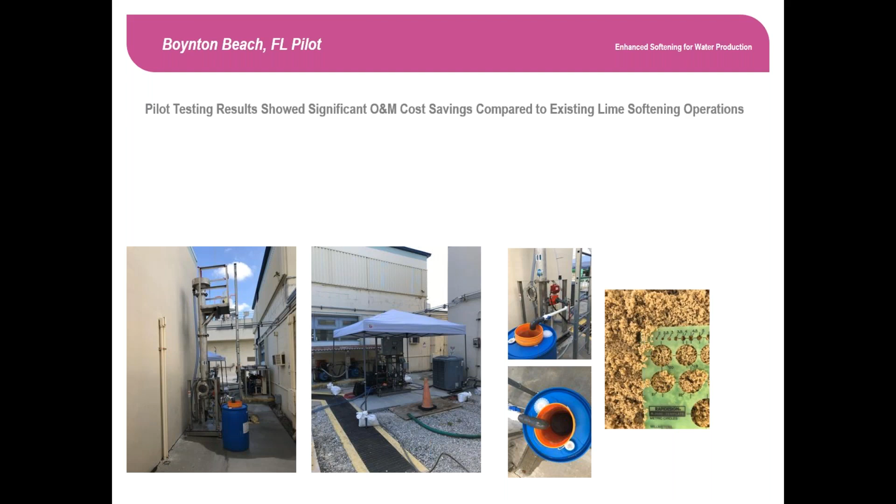We ran for a month at Boynton Beach, and in our pilot testing report we worked with the operations manager there and got some of their operating costs based on their conventional lime softening plant. We compared how we ran the pilot and the results we got, allowing us to do direct comparisons between the two.

When we used caustic with ACTINA, looking at chemical costs and sludge handling costs, we were able to potentially save them up to $280,000 a year. And when we used lime with ACTINA, we were able to save up to $125,000 a year compared to their existing operations. Most of that cost savings was related to chemicals and sludge handling.

There are a lot of other advantages associated with that we can talk about at a later time, but that was really the crux of those cost savings.

For Boynton Beach, their softened water total hardness goal was 80 to 120 milligrams per liter, which we could achieve pretty easily with either caustic or lime.

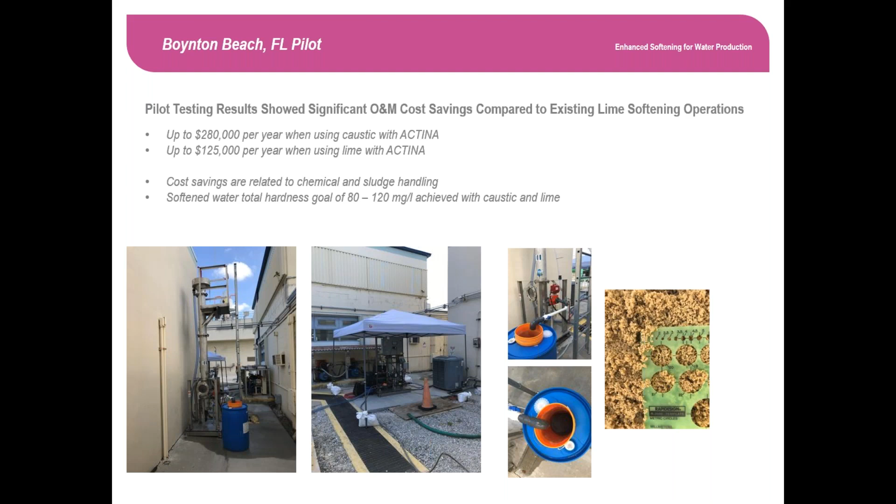I'm actually doing a webinar next week on the 12th, I believe, through TPO with Boynton Beach and an engineer from their engineering group, just to go over the pilot and talk about some of the results, and then go over these cost savings we were able to show based on the piloting results.

New Smyrna Beach, we just finished up there in October. We're in the process of writing the report and doing a similar cost analysis of what we showed in the pilot versus what they're currently doing with their conventional lime softening. Hopefully end of November we'll have that all wrapped up and have those numbers generated to see how we stacked up against their conventional lime softening.

I would say at first take it looks similar. The biggest difference, I think, is how you handle the conventional lime sludge. Boynton Beach landfills it, I'm not exactly sure what New Smyrna does, but I think it's a little different than what Boynton Beach does. Anyway, we'll have those numbers late November, early December.

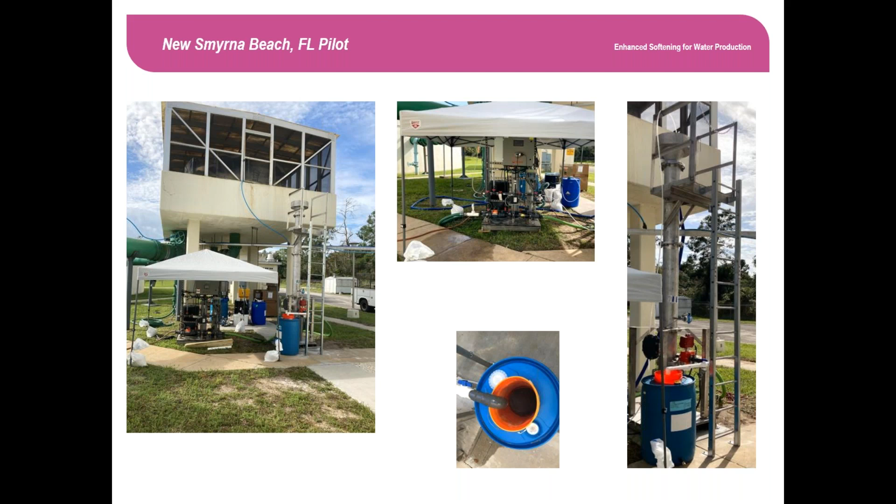One last pilot I wanted to talk about was out in Colorado. This was pretty interesting - it's an existing RO groundwater treatment plant that's been discharging their brine to a surface water for decades. I think the plant is 20 years old, and I assume they've been doing it the whole time. They have nitrate in their groundwater, so the RO brine is fairly concentrated with nitrate, and they will no longer be able to discharge that brine to the surface water because of the nitrate concentration.

So the municipality was looking at options for how to handle this. The first option was to keep the RO plant and treat the RO brine with softening and biological nitrate removal, so they could reuse that water and put it back into the distribution system. They compared that to replacing the entire RO plant with a new pellet softening facility. As of right now, they've abandoned the plan to keep the existing RO facility - since it was about 20 years old - and will go with a new pellet softening plant to treat the entire flow, so the brine issue goes away completely.

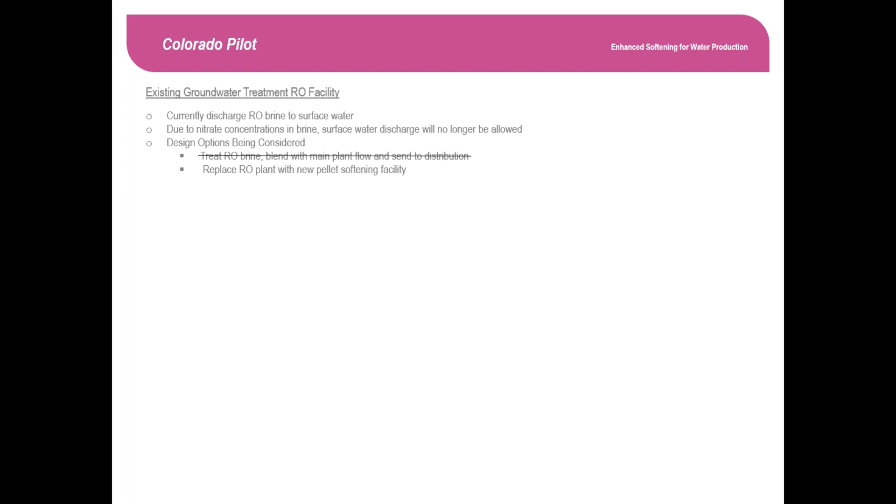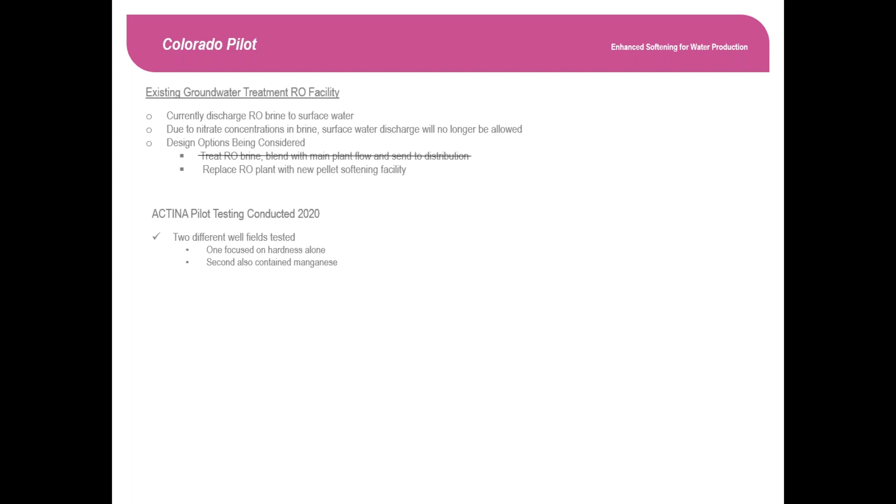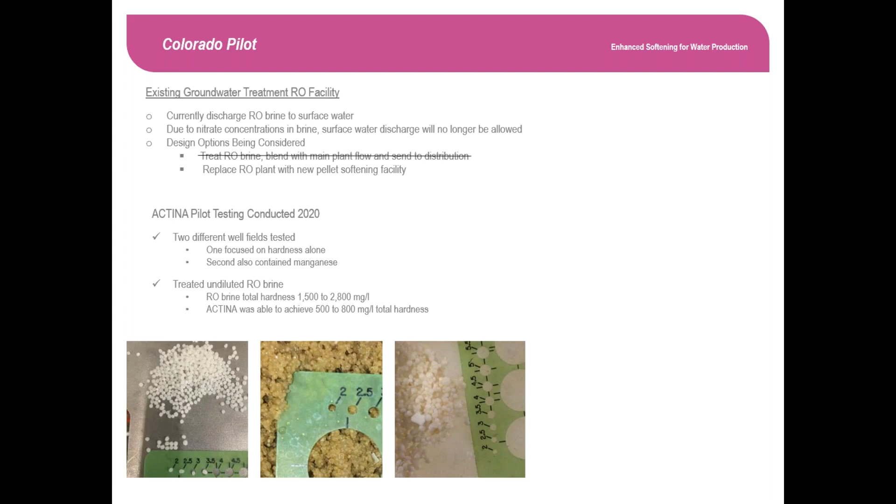So we're currently constructing or fabricating a separate structure that we will use to set it up outside, for these really high hardness applications. We can do various heights with our reactor, and then we'll have this second structure that they will tie in together from a support standpoint. The base of the pilot is anchored, and the base of the second structure is anchored in the concrete as well.

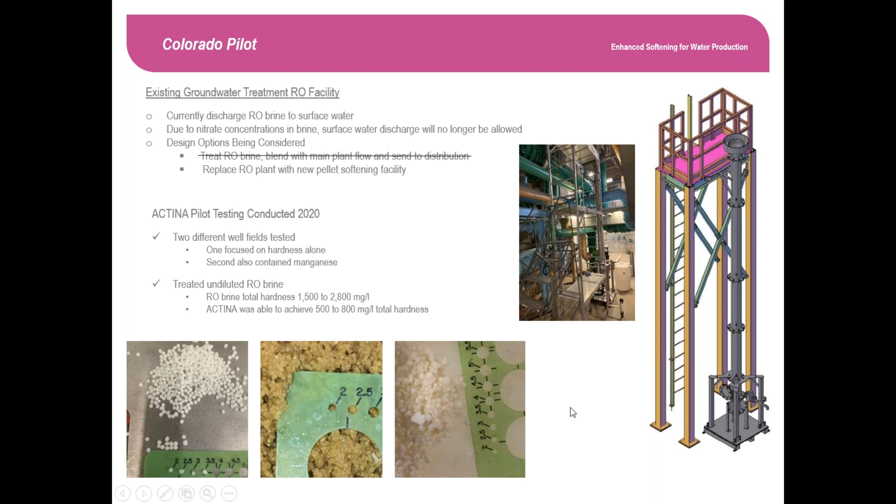All right, real quick summary - these are a little generalized, but from a total hardness reduction standpoint, it really depends on the calcium to magnesium hardness ratio in your hard water, but for total hardness reduction you're looking anywhere from 65 to 75% with ACTINA. Again, you'll get more of the calcium hardness than the magnesium hardness, but we do get a decent amount of magnesium hardness, and that's really driven by what pH you operate at. If you want to focus on getting more of that magnesium hardness, you can operate at a pH of 10 or higher. But most of the Florida jobs we've done so far, given the relatively high amount of calcium hardness in the water, we could operate anywhere from 8.5 to 9 pH and easily achieve the total hardness effluent goal - that's with caustic.

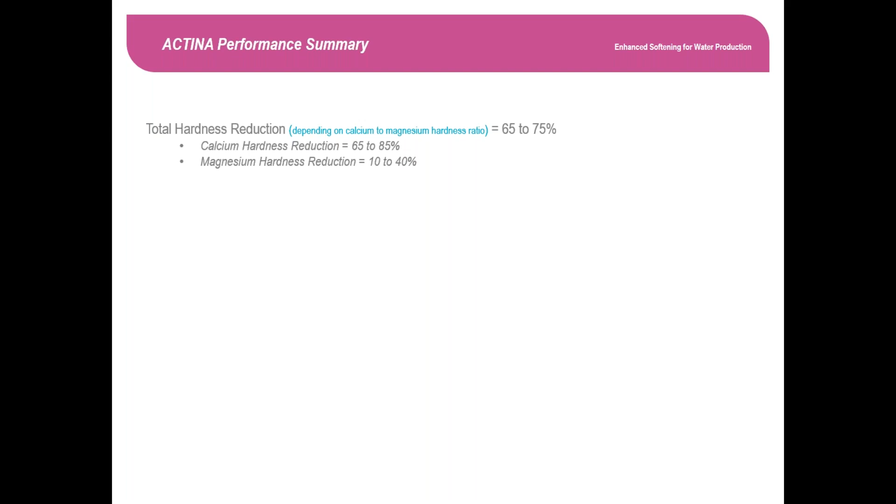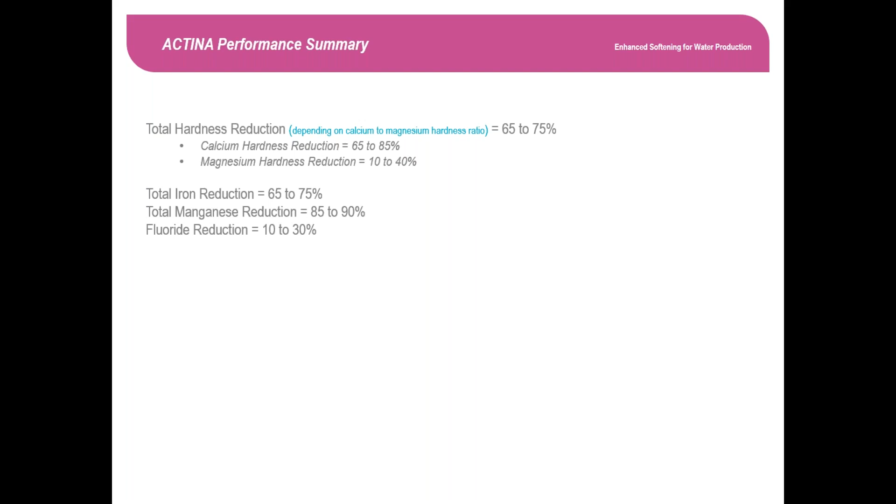From a total iron reduction standpoint, anywhere from 65 to 75%, manganese 85 to 90%, and we actually will reduce fluoride as well, depending on which pH you operate at. I mentioned organics earlier - we're going to be hopefully doing another pilot in Florida where we'll focus on enhancing organics removal by doing a pre-treatment step to see how much better we can get on organics removal. In general, the sodium hydroxide dose is somewhere between 80 and 130, and the lime dose is somewhere between 130 and 180. Again, this is some generalizations from recent pilots and full-scale data and things of that nature, but just to give you an idea of what we can do and the chemicals required to do it.